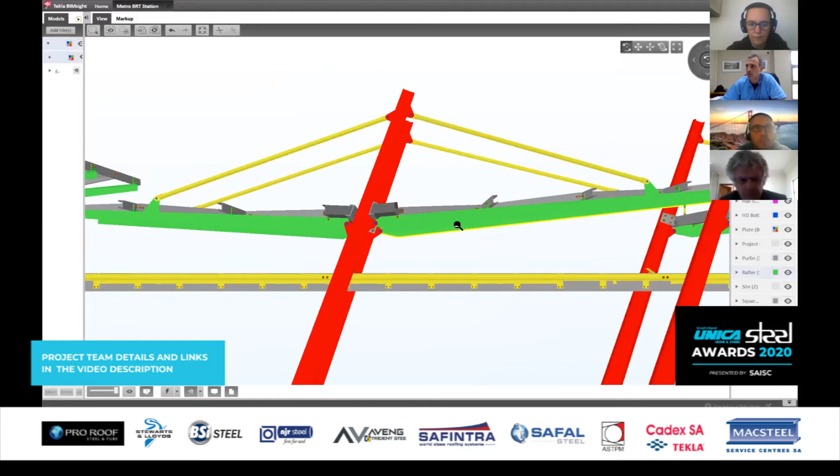And then it consists of these T-piece rafters, which are cut out of 305 beams. The latest ones we've done are out of bigger beams, but it's a T-section rafter, shaped also, but cut out of the beam. This in itself also causes warping. When you split that T-section on the center, the beam jumps like this. We have to sort of straighten these things also in our press.

It's got hangers hanging those rafters with the lip channels and the gutters, so they get sheeted on top.

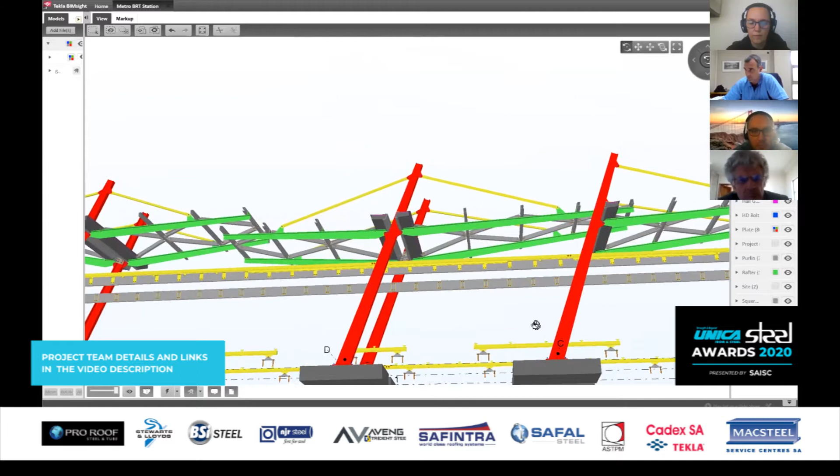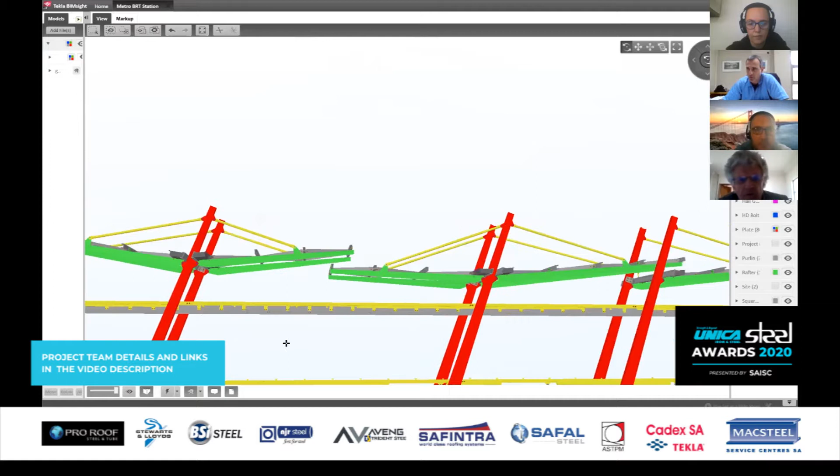And then I think probably the most complex part of the job for us was this, what they call the blue frame. It's just nicknamed the blue frame because it gets painted blue and the columns are red. But it's the facade, which is a rolled pipe all the way around.

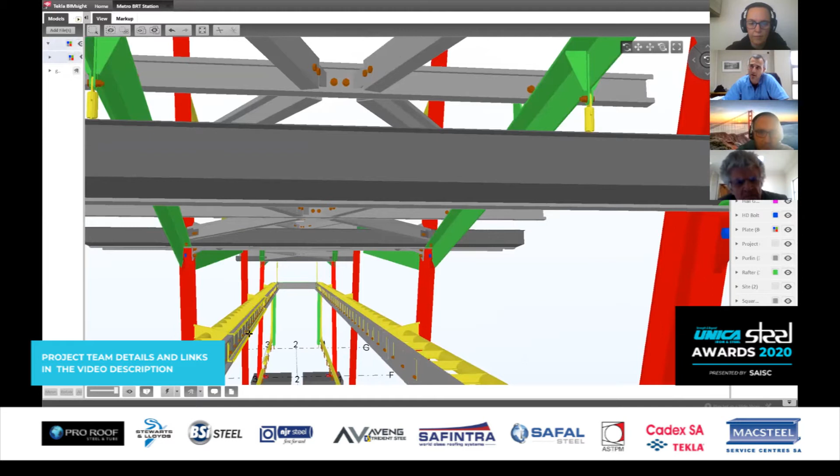It's rolled on the ends, and it's a pipe section, and it holds a lip channel. Try and get it like that for you. It holds a lip channel runner on the two insides with all the information boards for the buses go on here. So this was quite a challenge, as you can see here.

John, with your detailing experience, you'll also understand this. This is quite a challenge because you've got these pipes bolted to the columns with this big bracket, and then all these many brackets that are welded to this pipe support this lip channel. And this lip channel is the fascia, it's the facade.

That thing has to be so straight. That was our biggest challenge really on these buildings, to get this whole section nicely straight. And I mentioned with all the welding, you can see all these brackets are welded on one side of the pipe. So you can imagine what this pipe looks like after you've welded it up.

And another big challenge, that channel thickness was actually increased to make sure that at the end it actually doesn't warp. That's right. Yeah, it was like a 3 millimeter, and we increased it to a 3.5 or a 4 mil, so that it could be straight enough.

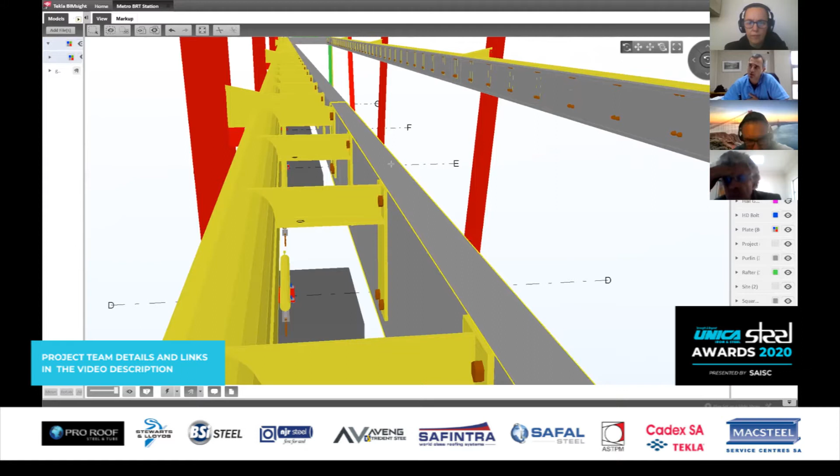And also interesting, I think Spencer would have enjoyed that. But on the joints of the purlin here, where it joins on the bracket, when this lip channel gets rolled in the mill, as it comes out of the mill, it just flares very slightly. I mean, you don't even know it. When it's in a building, it doesn't bother you at all. But since this was our facade, this flaring on the two ends was a problem.

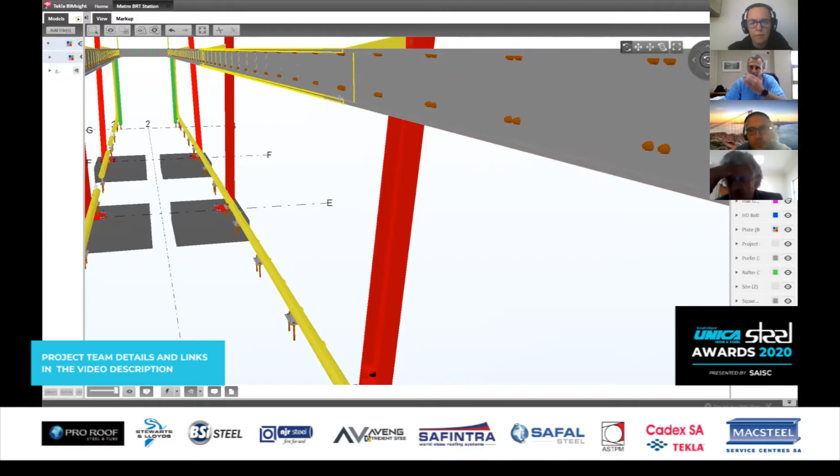So what we actually did, you can see in our detailing here, the lip channels are rolled longer, over-rolled, and then we cut them off straight with our saw in our factory, so that the end is 100% cut end. There are just so many of those kind of details that we had to do to try and get these fascias 100% straight.

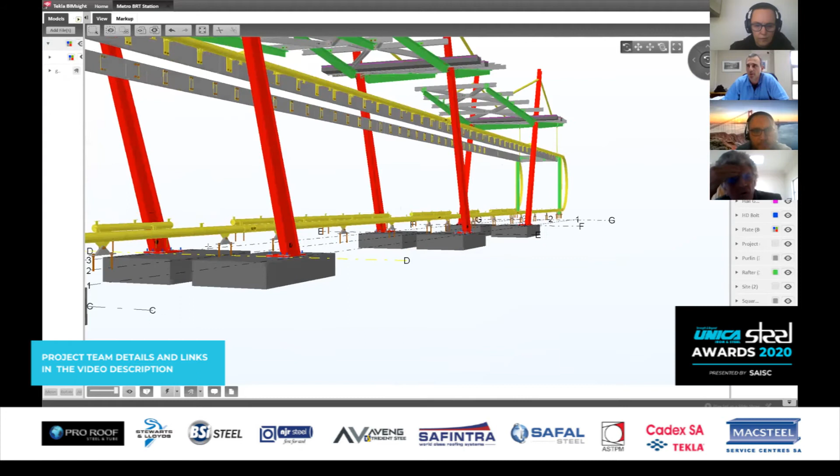The bottom pipe is fixed to the concrete. It's got shaped brackets which get drilled to the finished floor level of the station's floor. The architect also didn't want any grouting shown here. They wanted this plate flat on the floor, because it's the finishing.

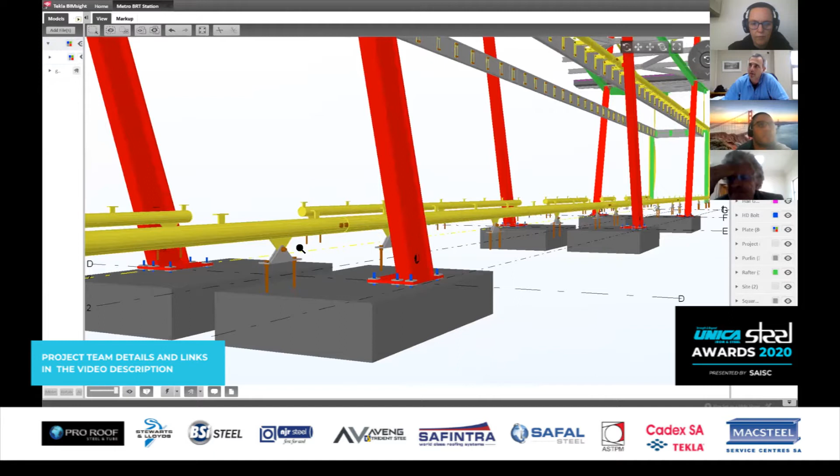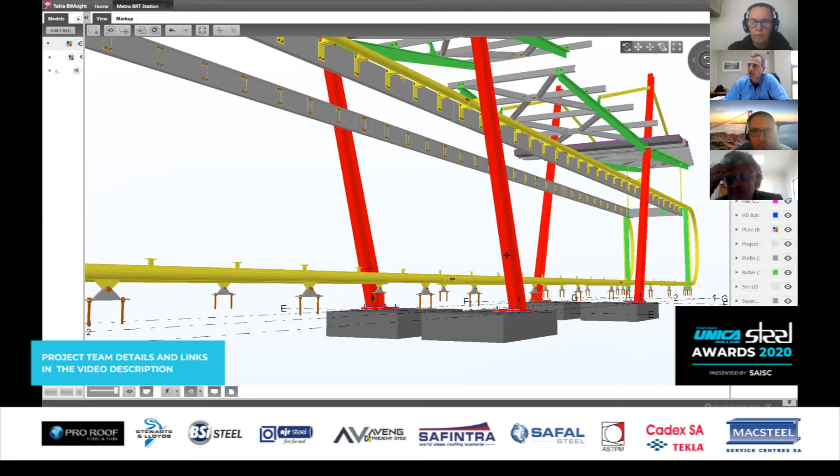So it was very important that we leveled these columns up, so that between the bracket at the top holding the pipe and the finished floor it was perfect. Because once you put that bracket down and drill it, the size for the glass between these brackets had to fit exactly. So there was quite a lot of planning required there.

Now, the one other thing that makes this structure quite unique, and you don't often notice it until you view the structure on site, is everything you see here bolts to these two columns, in sets of two. For the centers of these pipes to work, for the straightness to be fine, it means these columns have to be perfectly at the right level and perfectly at the right slope. If that slope is out by 1 degree, it messes with everything else that bolts to it. So it was a huge challenge.

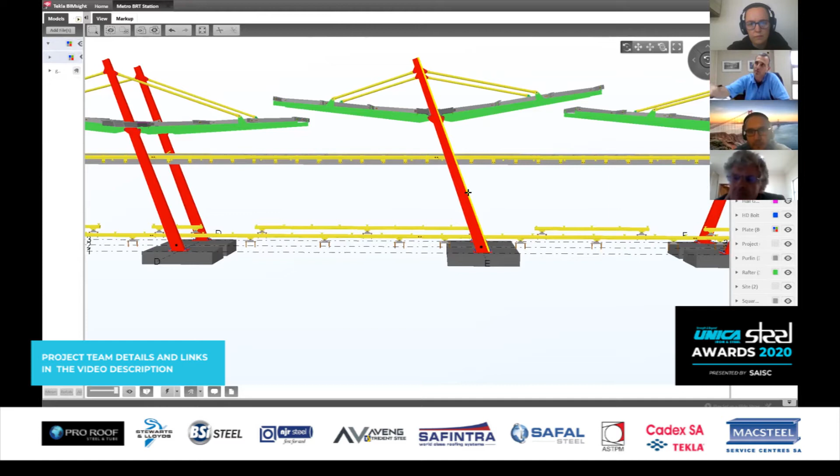We actually bought an electronic spirit level that gives you a certain slope. We worked out the slope of this outside flange, because it's also tapering, and that's what we gave our erector. So the columns had to be done at exactly that same slope. If you just change that slope, it changes everything.

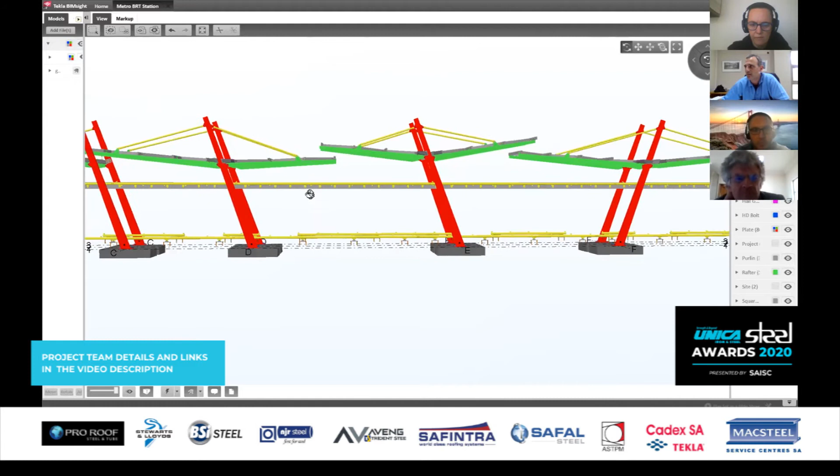One of these roofs was so flat that when the slope of the column was wrong, the runoff for the water wasn't enough. On this model everything starts flat, but in real life no road is less than 2%, so your flat is already at an angle, and that affected the roof.

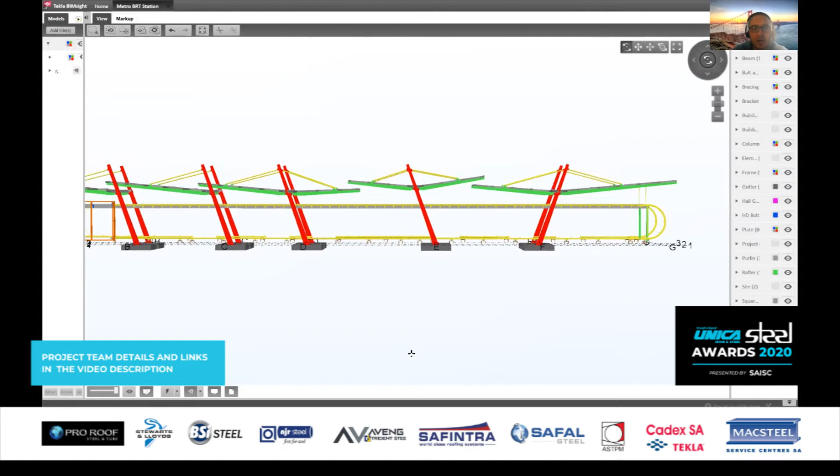You need at least a 2% slope to drain the roofs. Ideally you'd want a standard design to work everywhere, but because this thing was built all over Joburg, we had very steep road slopes, and had to change the angle of that roof to allow it to drain.

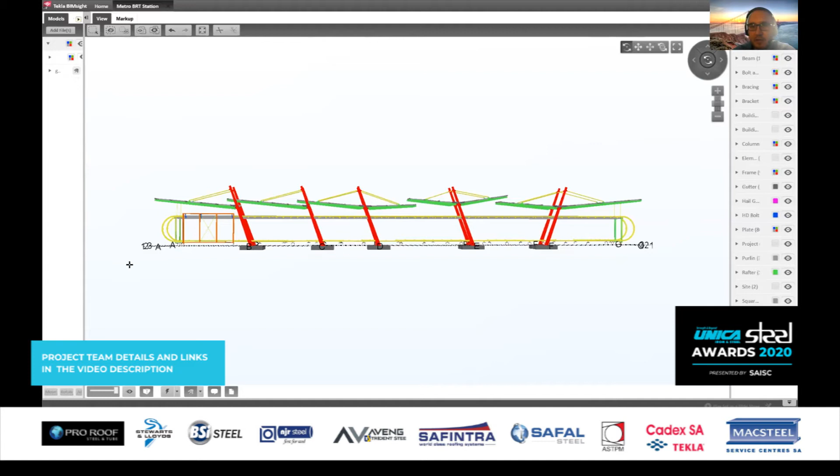So when you have a domino effect like in this picture, when one roof changes, all the others change. What we did is change only the hanger length, so at least the slope of your column stays the same. Because if you change the slope, then the setting out, everything is stuffed. So the easiest for us was to change the length of the hanger.

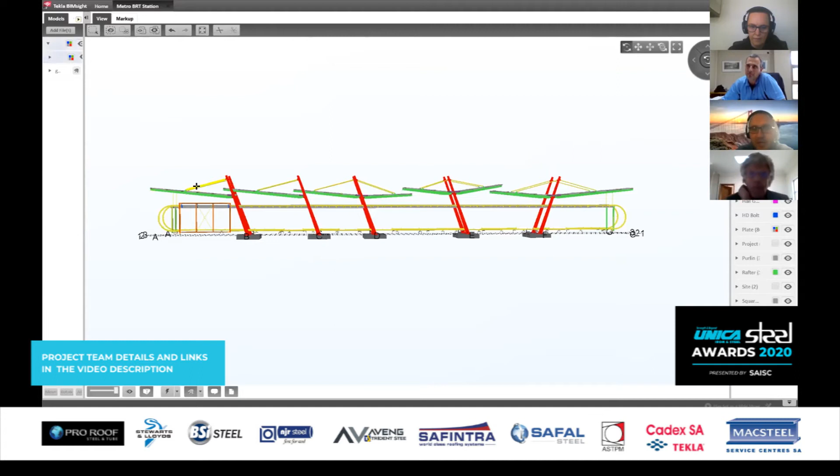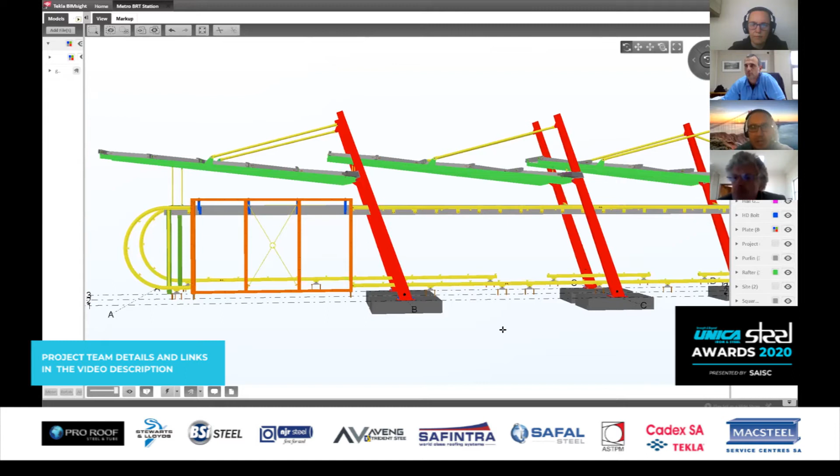Ideally you would only want that hanger working in tension, but depending on which side the wind is blowing from, it does go into compression. For that, we had to increase the size of those circular hollow sections to also allow for compression.

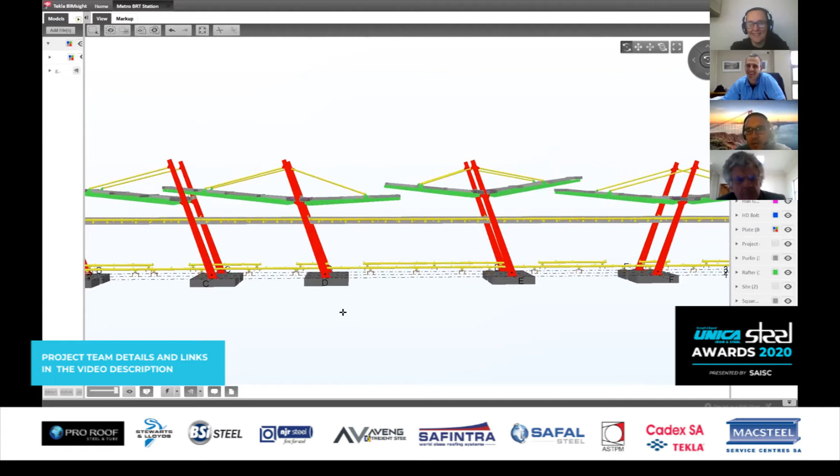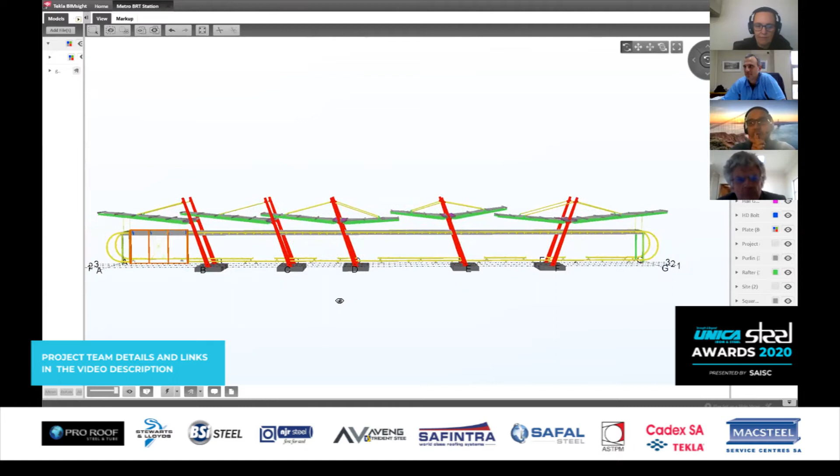The first question you'd probably have is why would one come up with such a complicated structure for a BRT? And the answer is not to enter for the Steel Awards. It was in this time when everything had to be connected to an animal. You can imagine the stadium in Mbombela, Nelspruit, connected to a giraffe, in the sense that the columns were shaped like a giraffe.

So this is meant to resemble a porcupine, and that's why we have all these spikes going out. I don't think the average user will know that, but you can sort of make that connection.

From my side, yes, same as the plate girders - the contract was split into two: the blue frame, and then the main structure. Luckily it landed with the same contractor to install. And then the sloped I-beams are quite visually appealing, but it does make construction very difficult, and the fact that all of these are sloped makes it not so easy.

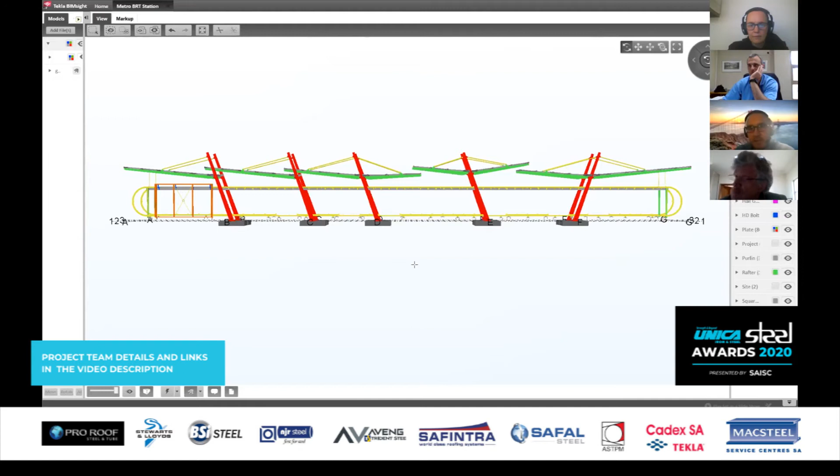What you don't see here is the concrete substructure. Inside the structure there's a whole concrete substructure that takes all the services. There's a battery chamber, and under here is typically a 1.2 meter deep trench under the structure. So there's almost a 3-month construction period before the steel fabricator can even come and install his steel columns.

Yeah, actually John, you forgot about that feature - the fact that these things go at a slope. That was quite important, actually quite a big thing, because we drew every building flat like you see it here, but on site that thing follows the slope of the road.

But yeah, it affected so many different things, so it was quite a challenge. What's interesting is nothing is level, so you couldn't even tell your guys, hey, this is what it must be, this is the level, because it's just so difficult to explain it on site.

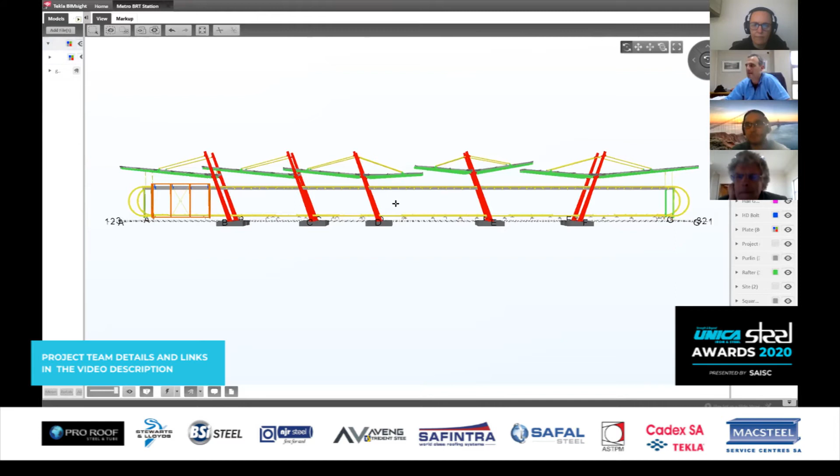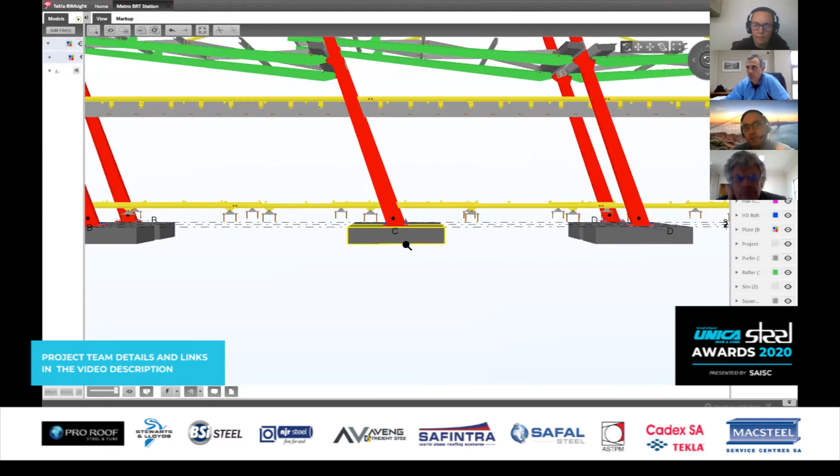So there was a roads team that came, and what's important for a BRT station, and typically for any bus station from a road user point of view, is when that bus stops next to the station, you need to be at grade when you cross into the station, so that makes it possible for you to go into the station on a wheelchair, on crutches, or as a healthy person.

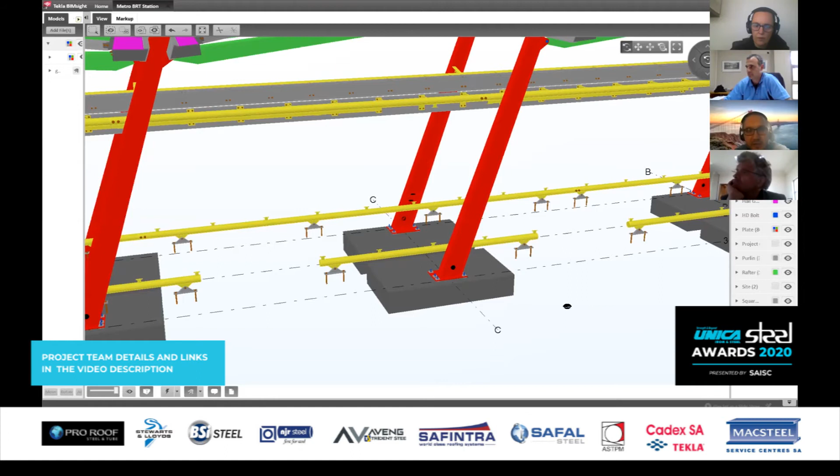So everything is set out from the road upwards, and the road team was already off site by the time the steel fabricator and the civil contractor arrived on site. So all of these levels had to be readjusted so that we can have a flat surface. Now, as we speak, there's a roads team going back to fix up all the levels to make sure that when you enter, it's flat. So for sure, a challenge.

And there's not one, there's many of these stations, 10 of them, but not one of them is the same. They are close, but never the same.

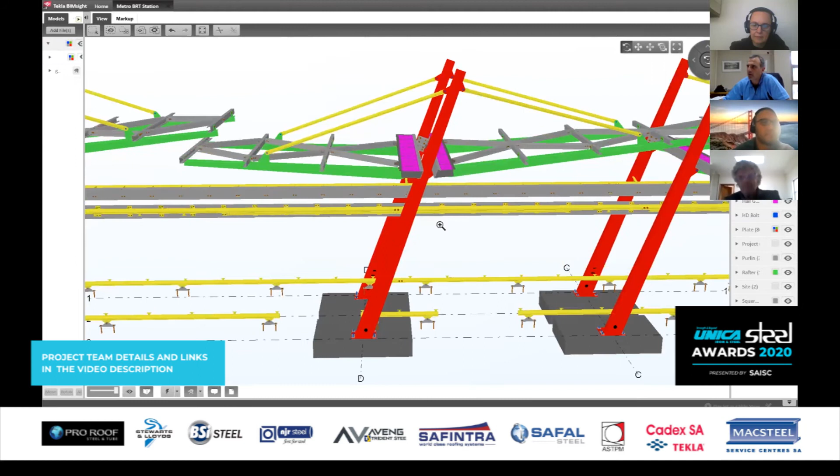Chris, can you give us a little bit more insight into the fabrication process? So yeah, look, I mentioned the fabrication of these pipe structures, the columns. That was quite simple - I think on the fabrication, it was obviously to account for all the warping that I've mentioned.

But if I can maybe show you this here, what was quite a challenge for us, as a learning curve, is this pipe that's welded with these brackets on. We were quite surprised how you'd build this thing and think it's fine, but 1 millimeter out here causes the bottom of this thing to be out by 3 or 4 mils, which causes the straightness of that lip channel to go off. So after about 2 stations, we really had to relook at the accuracy of how we locate these brackets all along this pipe - that really needed a lot of input.

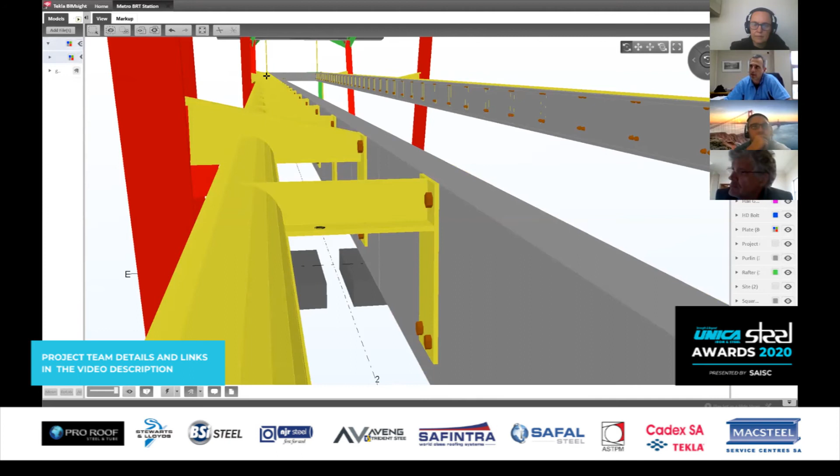And then, I mentioned the lip channels - after about 4 stations, we requested to make it thicker because the thin material just simply wasn't straight enough.

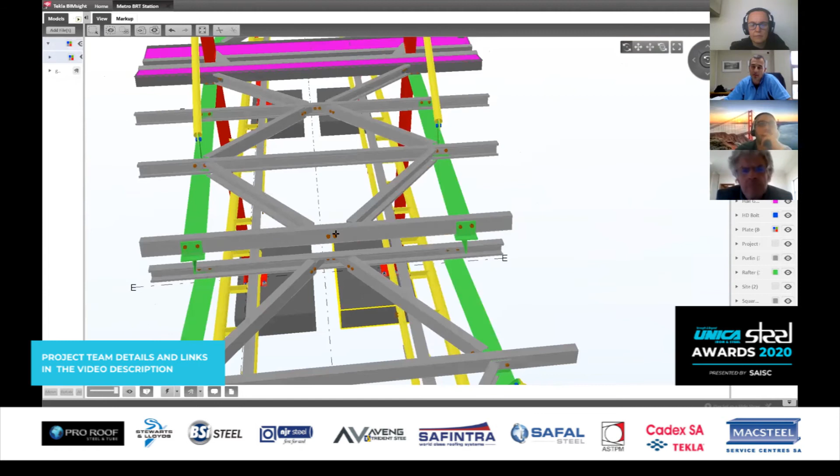Yeah, and then everything had to be the best quality. I think the painting was another facet where the architect, when they came right in the beginning to our premises, made it very clear that they don't want to see blotchy painting, or sometimes when you roll on steel it's not smooth, and they wanted this perfectly smooth finish. So we used a very good paint spec that will handle the weathering of being outside, and also give that smooth effect.

So I think from that side, it was really just those challenges. The rest of the fabrication, I think, is pretty straightforward, but there's a lot of attention to detail that we had to do.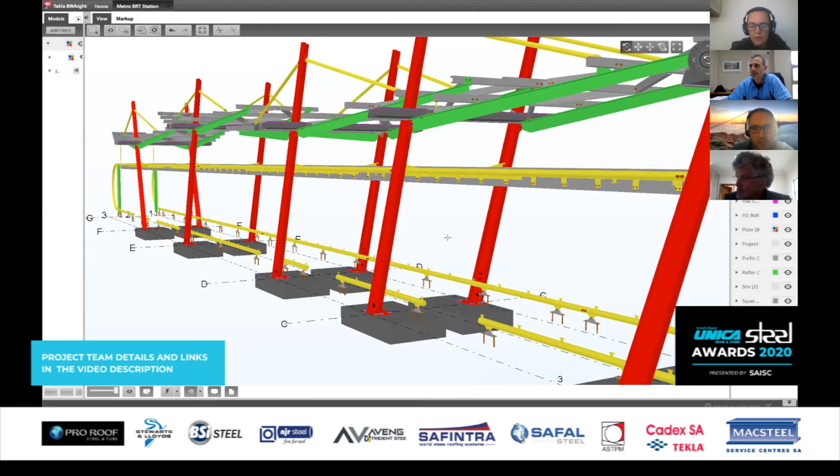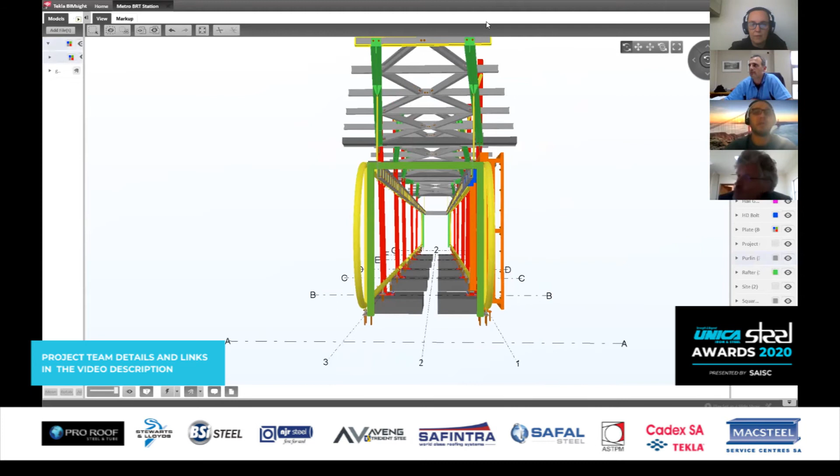So maybe this is a question for both Chris and Johnny - how would you say that this project demonstrates the benefit of steel as a material? Can you go first, Johnny? Yeah, can I share another picture for us before we answer? The Tekla model, she is pretty for sure.

It's an architecture rendering - this is actually Watt Station, but they're all very, very much the same. So look, the benefit is you wouldn't have been able to construct this in concrete, certainly not for the same price, and also not to these dimensions, because you need reinforcement. Also the timing - this specific project happens in the middle of the CBD, where there's a lot of unrest.

So all the fabrication that you can do off-site really helps. So the 2 benefits of using steel are, number one, the shapes that we were able to do - also the slenderness of the columns would not have been possible in concrete. And then the other thing is really the off-site fabrication that really helped the program.

Chris, do you want to add anything?

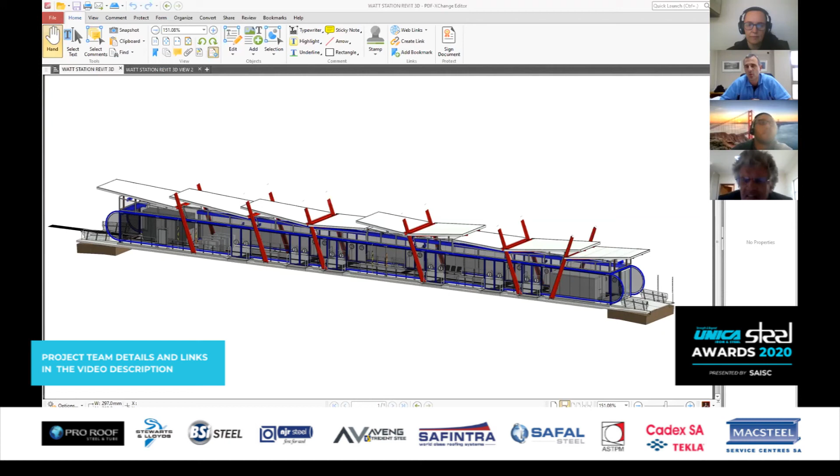If I can add to that, constructability on site, my motivation is the site was literally the size of the island that this thing sits on. So there wasn't even really space for us to come in with trucks and cranes the way we'd like to work next to the building. We even had to load the steel in a sequence where the crane stands in the middle, a small spider crane, and as the truck came in, they could erect from the truck in the sequence they need. Like Johnny said, you can only do that with steel.

I think whatever the architect wanted, envisaged, it's nice to hear this story of the porcupine. I think what they wanted can only be done with steel. If you look at the interface between the steel and the glass, it's beautiful. You can't do that with anything else. That's just what makes steel what it is. We say it every year, Denise, but it's a fact - when you want to do something a certain way, you can only do it with steel.

Yeah, that's good. So it kind of touches on my final question, and then I'll see if John has any other questions. What are you, Chris, most proud of on this project? And then we can hear from Johnny as well.

I think the fact that we finished. Final invoice in. No, it had its challenges - huge challenges. Johnny mentioned the unrest at the stations.

It's actually been quite something to deal with, but anyway, I think what I'm proud of - and it's not to say anything about other contractors - but they took us to see sample buildings before. This team between Stefanutti Stocks and us, I think we built about 15 stations that must still be erected. But the quality of these stations is so high. When you walk through them, the amount of hours we've put into fixing things, straightening things, making sure that the final product we've given the client is 100% acceptable - I think that's something we're quite proud of, because it really is.

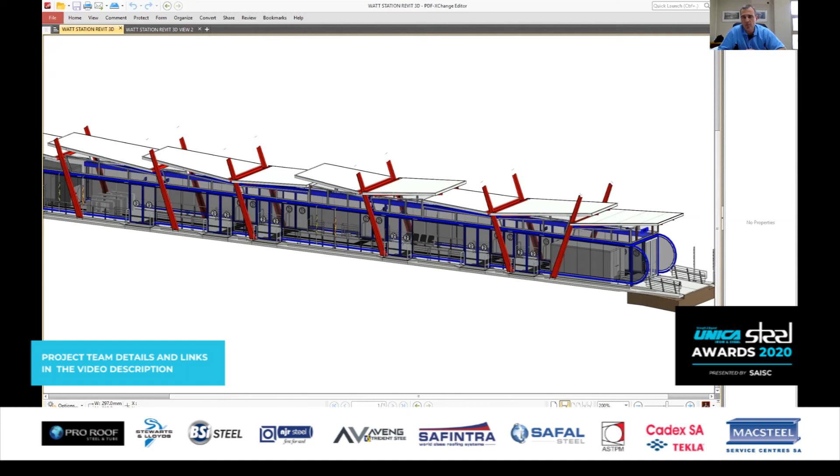The finishing is really done well, and there's a lot of work in the interface between the glass contractors and our contractors, and it really just comes together very well. I think you're proud of those structures when you see them there, and I think that's the main point - the glazing in these frames.

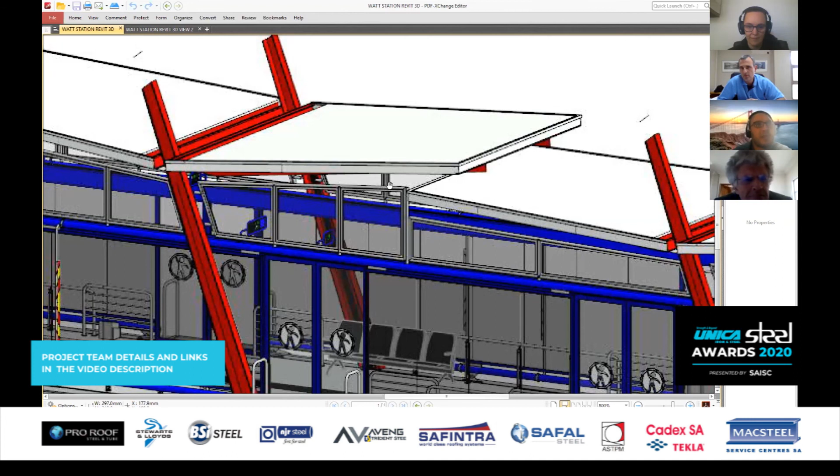And those are again supplied by another contractor, Chris. Yes, and they have to fit in - you can see if the slope roof is different to this, you'll see immediately. So the facade team comes in afterwards, and if Chris's team didn't do something right, you'll see immediately. So all the Lego pieces need to tie up.

From my side, what we like about this project and why we're proud of it is that these stations are aesthetically pleasing, and it's all over Joburg, so it's copy paste in a way, but they're all unique, and the guys on site will be able to testify why.

Some of them are unique because of a manhole that was found at a place where we didn't want it, and some are unique because of very steep slopes, and others are unique because they were held at gunpoint while erecting. But the main thing is that the same sort of pattern is throughout the city, so you get that feeling throughout the city that this is taking you somewhere. The bus goes from station to station, and you can feel it when you drive by that you are going somewhere.

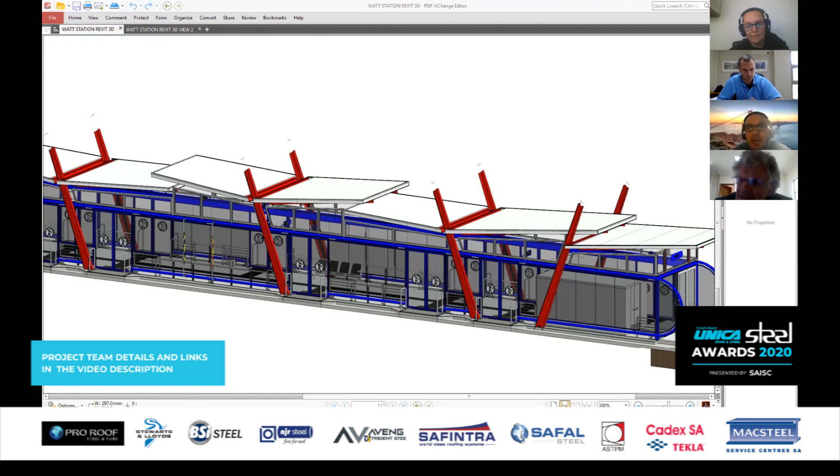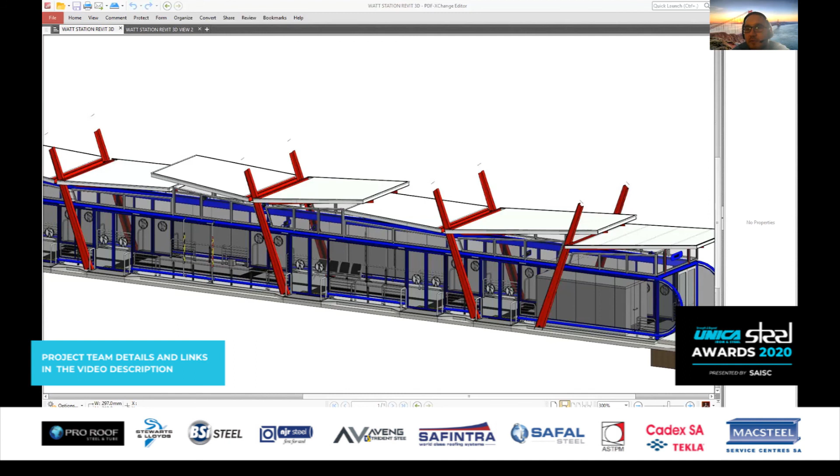The next thing that's very important for us, and why we're proud of this project, is there's a lot of money spent on many projects in this country, but very few of those projects actually benefit the really poor people in the country. These stations are located in the heart of Alex, the heart of Joburg, up to Soweto. So all the poorest people use these or will be using these stations, and will be interacting with these structures. Although there are stations in Sandton, this is meant actually for the lower class of people, and I think that's important.